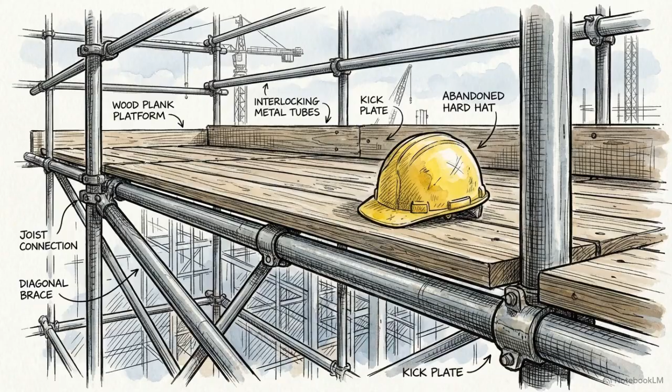For decades, construction workers have been told to keep a straight back and bend their knees. Yet manual handling injuries continue to account for more than a quarter of all reported accidents to the authorities each year. Decades of manual handling training have failed to move the needle on injury rates. Back and upper limb issues remain the leading cause of construction-related absence because building materials are consistently denser and larger than a human can safely manage alone.

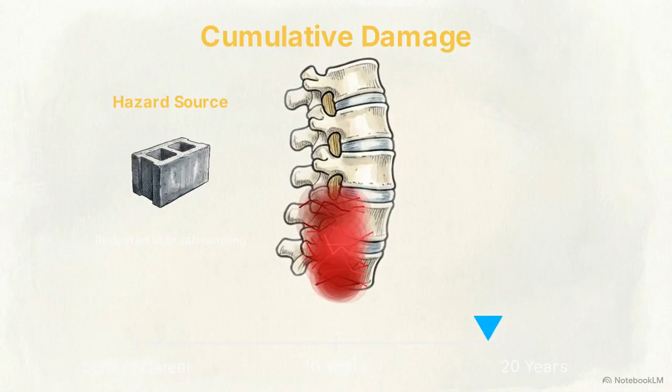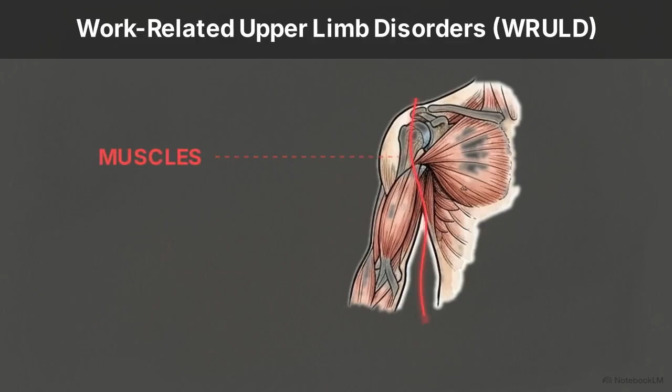Musculoskeletal disorders, or MSDs, are rarely the result of a single dramatic trauma. Instead, they manifest as cumulative damage—the inevitable result of continual bad lifting, twisting, and stretching over months and years of a worker's career. A severe form of this is known as a work-related upper limb disorder, or WRULD: an injury to the muscles, tendons, or nerves of the arms and shoulders, directly caused by carrying out repetitive, strenuous operations over long periods, such as tying reinforcement bars or laying dense blocks.

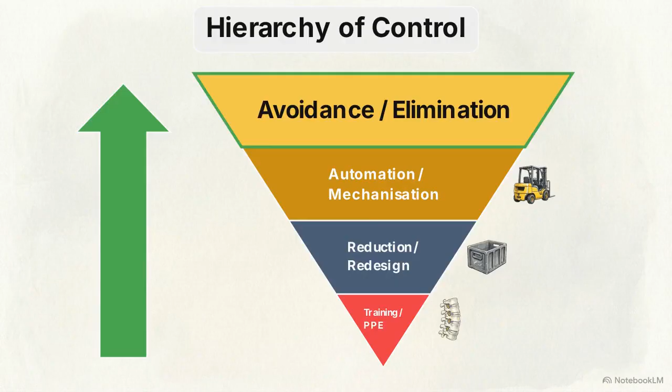In the context of a NEBOSH exam, relying on a worker's lifting technique to prevent these injuries is a failure of risk management. If your proposed solution to a manual handling hazard is simply more training on how to lift, you will not score highly. The required hierarchy of control moves in the opposite direction. It demands engineering out hazards at the design phase, conducting rigorous, multidimensional risk assessments, and introducing strictly regulated mechanization to remove the physical burden entirely.

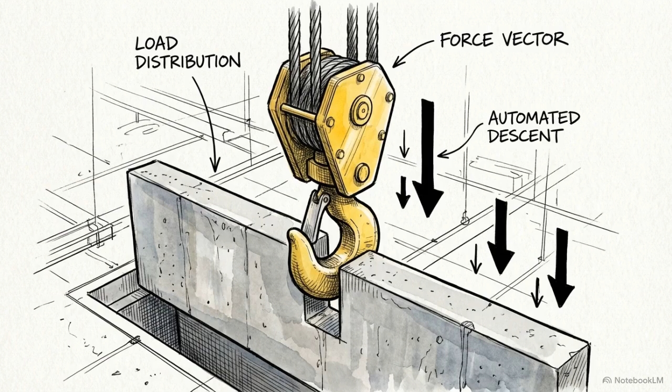Musculoskeletal health on a construction project relies on engineering and logistical decisions made long before a worker ever touches a load. To solve that engineering problem, we must apply ergonomics. Ergonomics is the study of how human beings interact with their working environment, machinery, and processes. It dictates that the task must be designed to fit the worker, rather than forcing the worker to contort to fit the task. The primary duty falls to the designer.

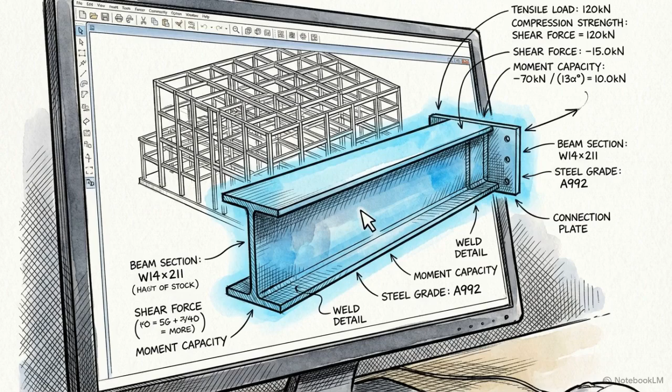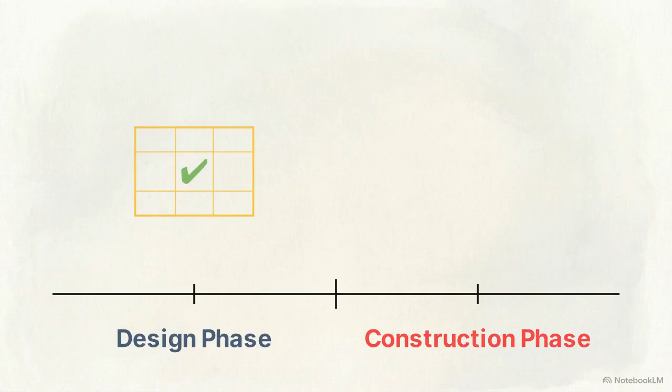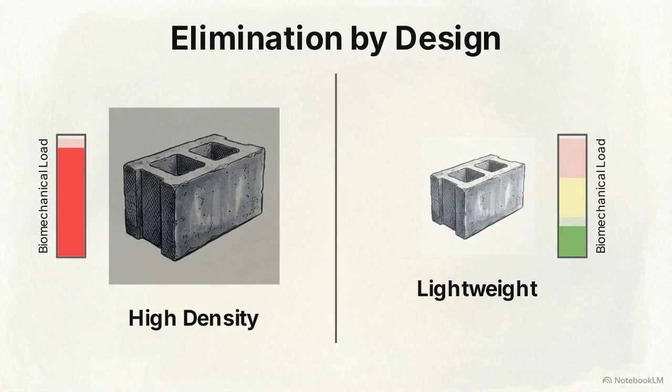Designers are uniquely positioned to assess health risks introduced by their requirements and change the details to reduce the need for long-duration, repetitive, or strenuous activity before the project even breaks ground. This diagram illustrates elimination by design. By simply specifying lighter blocks instead of traditional high-density blocks, the designer removes the need for heavy manhandling entirely, immediately reducing the biomechanical load on the bricklayer.

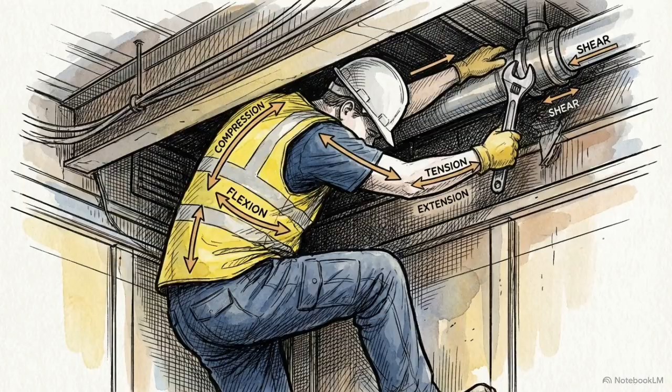Design also dictates mechanization. If an architect dimensions a trench specifically to accommodate the bucket size of an excavator or a remote-controlled compactor, they eliminate the need for a worker to climb down with handheld vibrating tools. Conversely, thoughtless design creates immediate hazards. Specifying service runs in cramped, low-clearance ceiling spaces forces workers into awkward, stretched positions, virtually guaranteeing strain over a long shift.

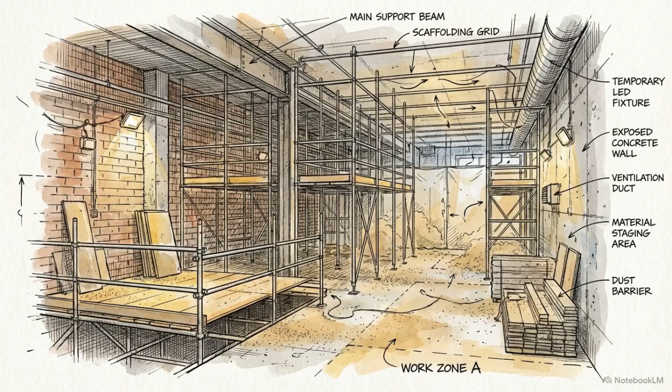The environment specified by the design also heavily influences ergonomics. Low illumination levels lead to accidents because of an inability to see properly, causing visual misperception and awkward posture adjustments during detailed inspection or assembly work.

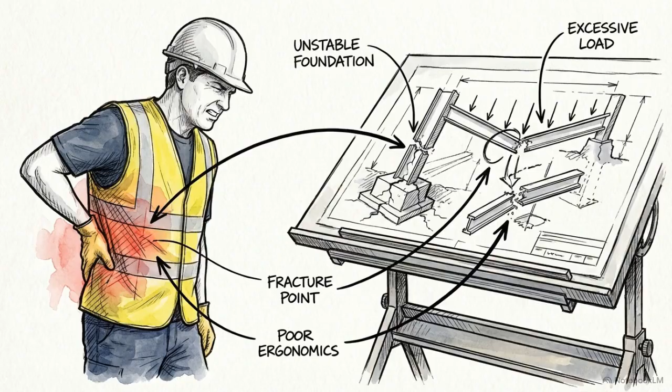When design hazards cannot be completely eliminated, the designer must practice controlling hazards by information. They must communicate these unavoidable risks, like the need to work in a small space, to the principal contractor so it can be managed through the health and safety plan. If the physical demands on the site worker become too high, the risk management failure almost always started on the designer's drawing board.

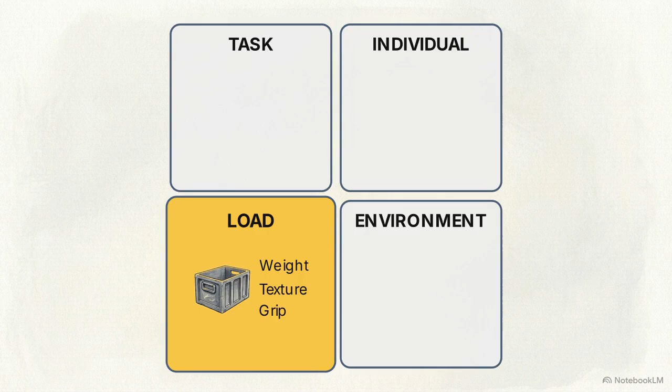When manual handling cannot be avoided by design, the manual handling operations regulations require employers to make a suitable and sufficient assessment of the task. This diagram shows the required framework for that assessment, commonly known by the acronym TILE: Load, Individual, Task, and Environment. The load quadrant evaluates magnitude alongside dimensions, surface texture, and the presence of integral handles, as a slippery surface carries far higher risk than a heavier object with a secure grip.

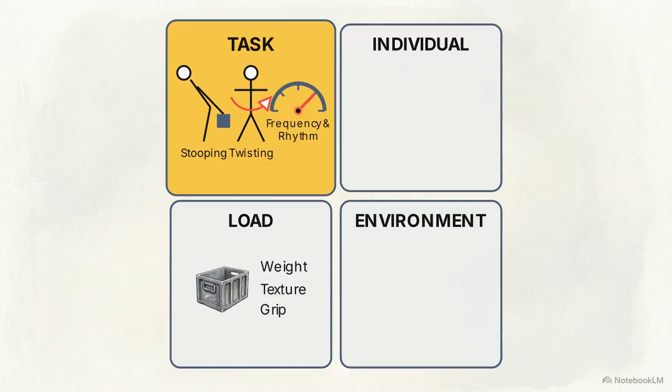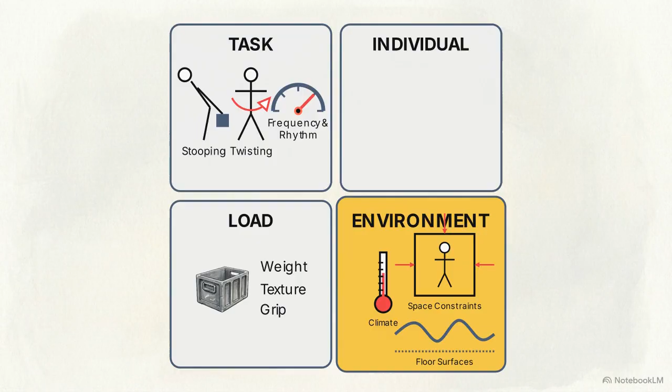The task quadrant scrutinizes the geometry and rhythm of the movement. High frequency, long duration, twisting, stooping, and reaching all escalate the risk profile, even if the load itself is light. The environment quadrant evaluates the space where the lift occurs. Restricted workspaces, uneven ground, and extremes of temperature compromise a worker's posture, forcing them to adopt inefficient stances that increase muscular strain.

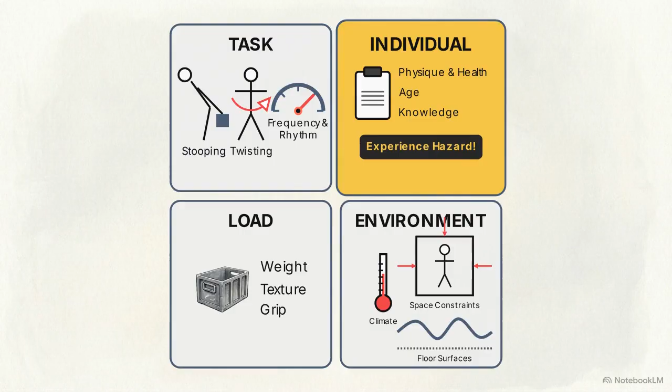Finally, the individual quadrant looks at physical capability, age, and health. It also accounts for experience, which can actually be a hazard, as experienced workers frequently misjudge their own capabilities and overestimate their limits. In an exam setting, a critical mistake is answering a manual handling question by focusing solely on the weight of the load.

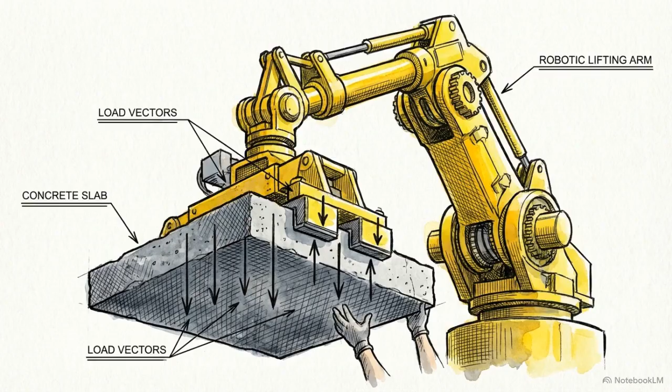Setting safe weight limits is not an effective risk management strategy in isolation. The regulatory mandate is clear: before relying on manual effort, employers must provide equipment to avoid the hazard, automating or mechanizing the process wherever reasonably practicable. A safe lift requires perfectly aligning the worker's physical capability with the load's characteristics, the geometry of the task, and the conditions of the environment.

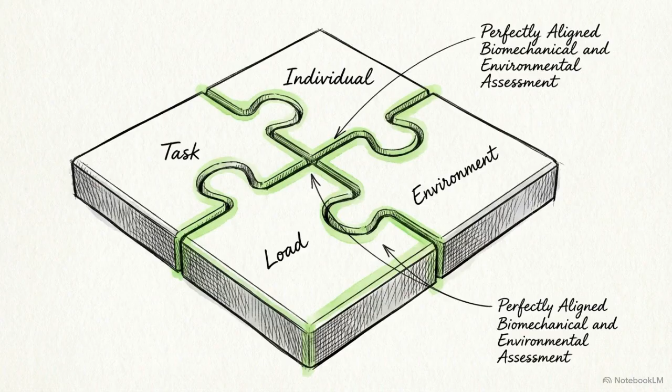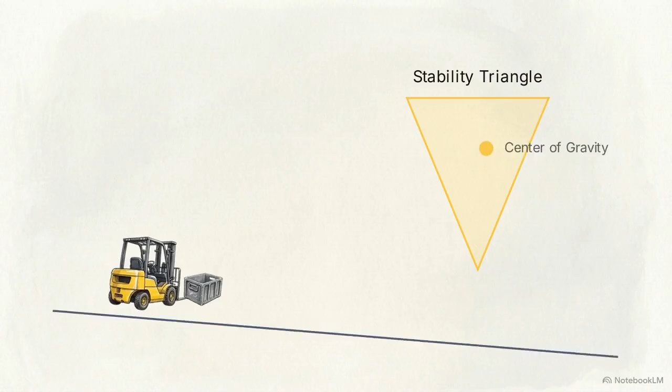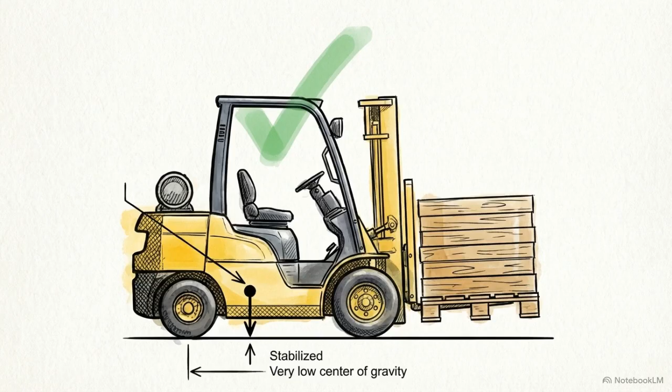However, if the truck travels across an incline with the mast raised, the center of gravity moves outside the vehicle's stability triangle. Overturning is almost guaranteed. Because of these physics, strict operational rules apply.

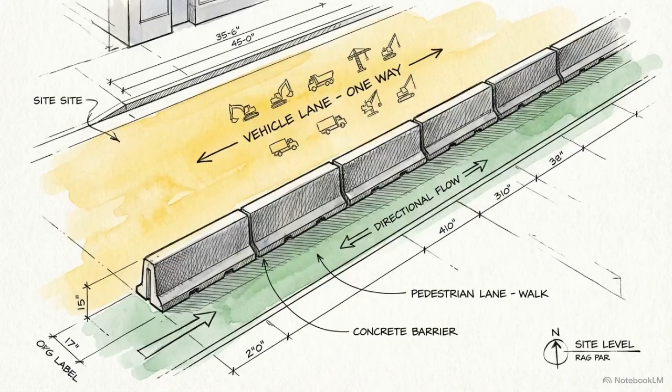Operators must only travel with the load lowered, never turn across slopes, and site management must provide designated crossing points to separate pedestrian routeways from plant.

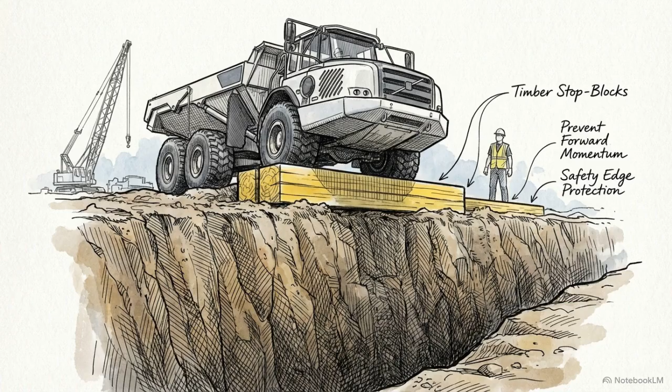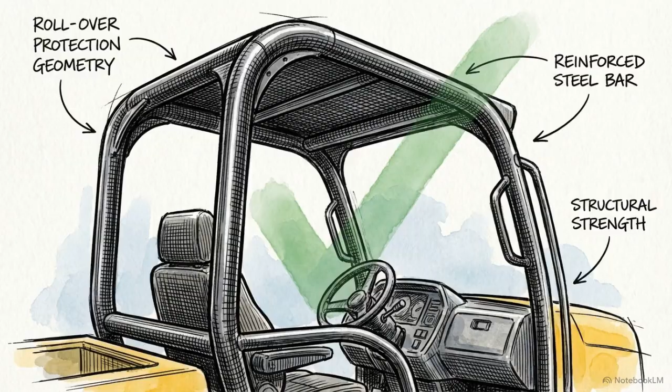Dumper trucks present unique vulnerabilities. Because they use pivot steering by articulating at the middle of the chassis, they are highly susceptible to overturning, especially into excavations if stop blocks are not positioned a safe distance from the edge. To mitigate this, dumpers must be fitted with ROPS, rollover protection structures. A ROPS is an A-frame built over the seat to protect the driver.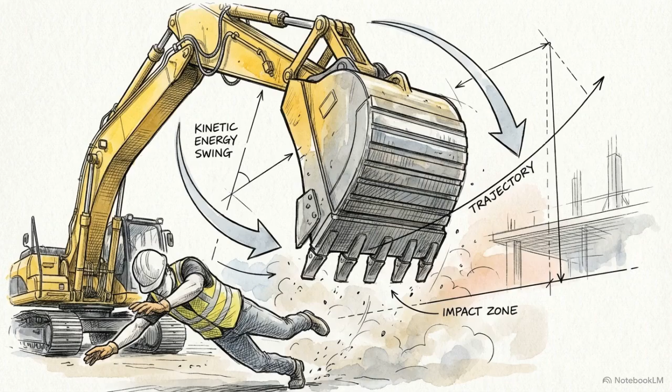Crucially, operators must be instructed to wear seatbelts so they are held safely within the roll cage if the vehicle tips. Excavators require entirely different controls. Beyond the danger of the moving articulated arms striking a worker, operators face the hazard of undercutting. This occurs when the machine digs directly beneath its own tracks, causing the ground to collapse and the machine to fall into its own excavation.

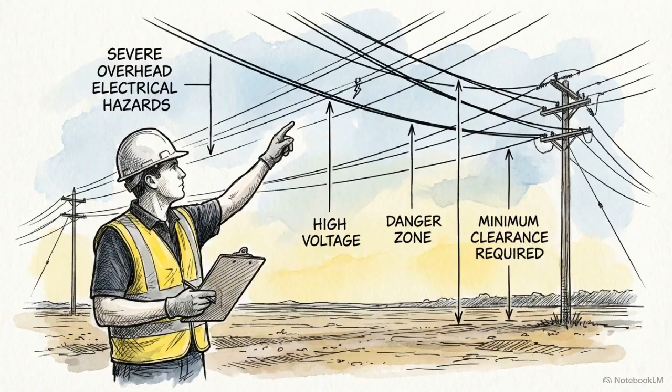Safe operation requires vital pre-start checks. A site survey must be carried out in advance to identify overhead power lines, height limitations, and underground services like gas and water pipes. The fuel powering these machines introduces secondary risks.

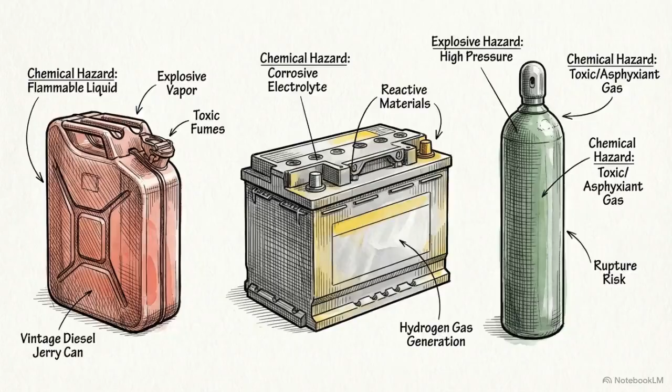Diesel engines expose workers to carbon monoxide fumes and fire risks, while charging battery-powered plant creates hazards from caustic acid, electrical arcing, and the buildup of highly explosive hydrogen gas.

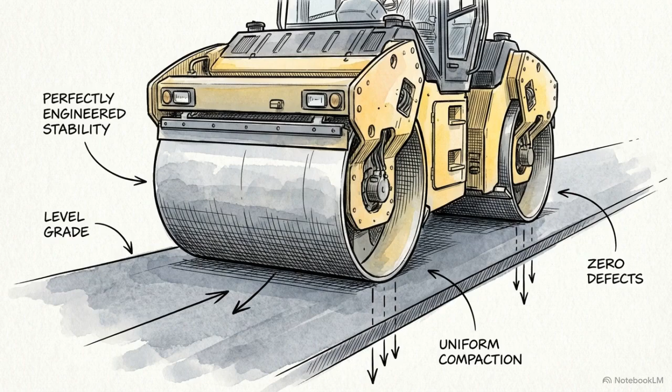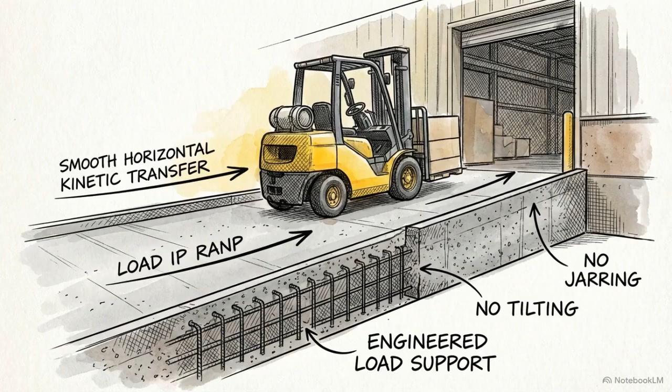Direct supervision of every site vehicle is impossible. Therefore, the examiner expects you to prioritize controls like site layout, flat driving surfaces free of potholes, and ensuring only competent certificated operators hold the keys. Mechanization is only a valid risk control if the site environment is engineered to support the physical limits of the machinery.

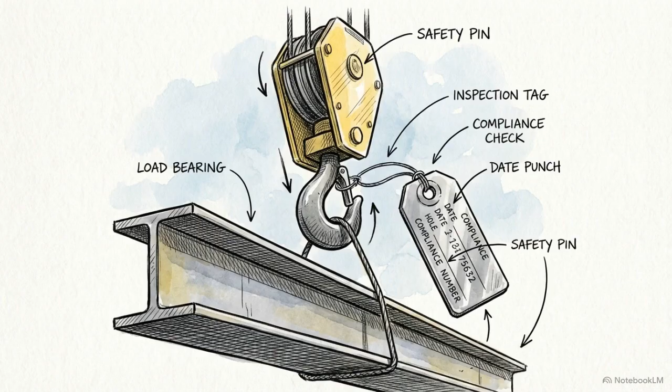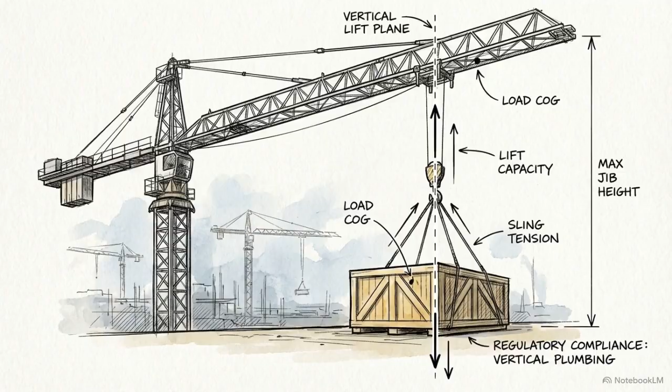When plant is used to suspend a load, it falls under LOLER, the Lifting Operations and Lifting Equipment Regulations 1998. LOLER is the strict regulatory framework governing any mechanical lifting of a load in a vertical plane. The baseline requirement of LOLER is that all lifting equipment must have adequate strength and stability for the proposed use.

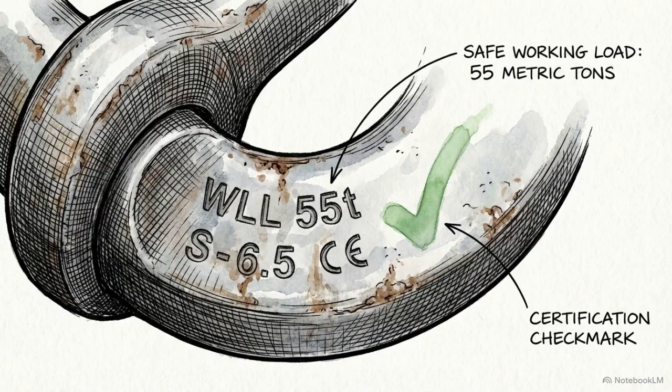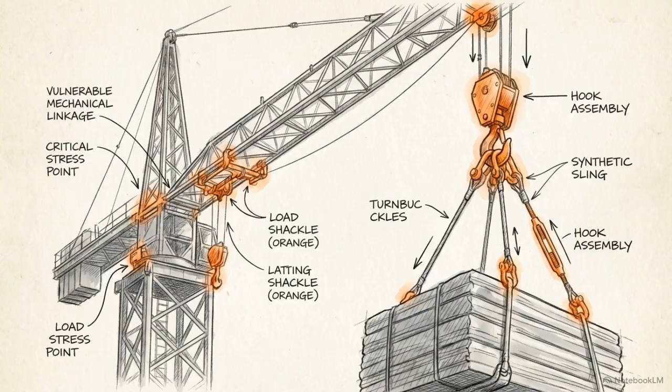Furthermore, every item must be clearly marked with its safe working load, or SWL, which dictates the absolute maximum mass it is legally permitted to lift. The integrity of the lift often relies entirely on the lifting accessories, the slings, shackles, and eye bolts used to connect the equipment to the load. These accessories are the most vulnerable components in the lifting operation.

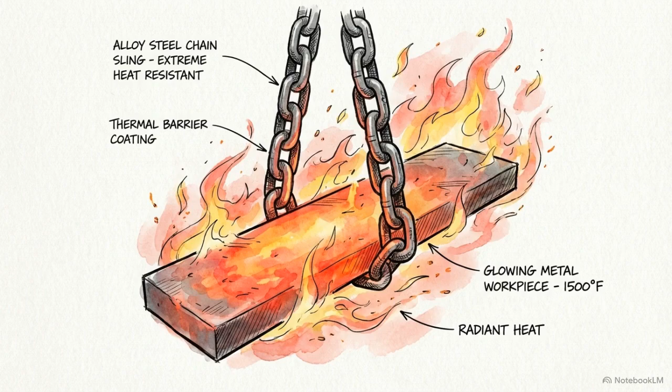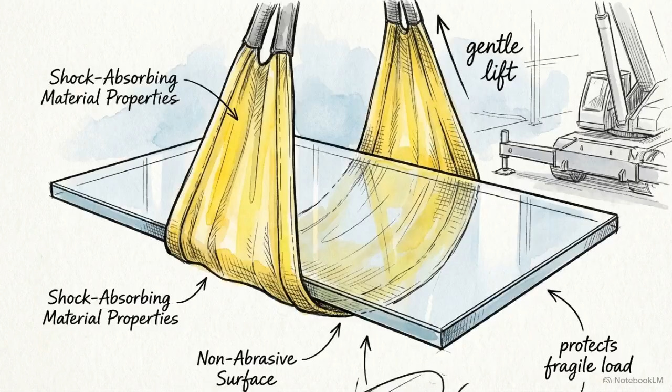Material selection is critical. Chain slings are excellent for handling loads up to extremely high heat, but they are vulnerable to catastrophic failure from sudden shock loading. Synthetic web slings will not scratch delicate surfaces and absorb shock well, but they will melt and fail if exposed to high concentrations of acid.

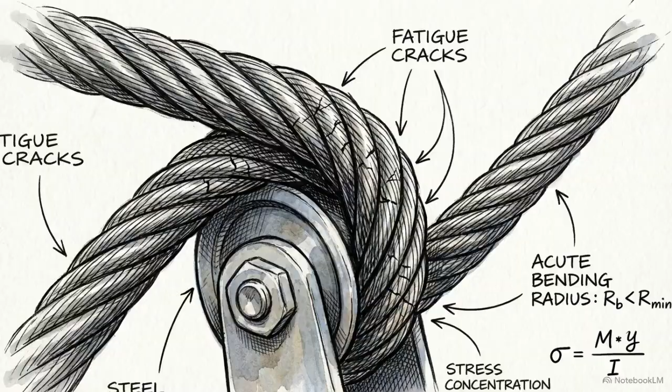Wire rope slings fail from fatigue. Repeatedly making small radius bends causes tiny cracks in the wire strands. Over time, this structural abuse leads to bird caging, a critical defect where the wire rope strands are forcibly untwisted and spread outward, permanently destroying the sling's strength.

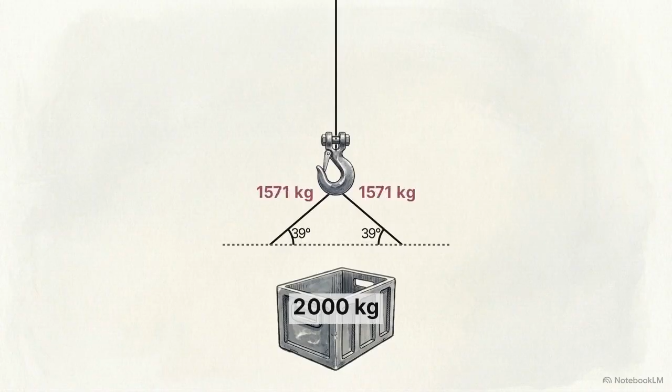This diagram shows a crane hook lifting a load with a two-leg sling. As the angle between the sling legs widens or flattens out from 60 degrees down to 30 degrees, the physics of rigging dictate that the tension and stress exerted on each leg increases exponentially, even though the weight of the load hasn't changed. The hardware connecting those slings must match the geometry.

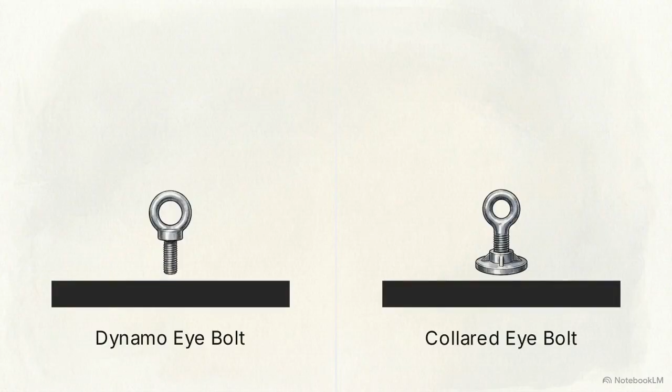Dynamo eye bolts have a weak neck and must only be used for direct vertical lifts. If a sling is pulling at an angle, the collared eye bolt must be used, as the substantial neck provides the necessary strength to support the offset component.

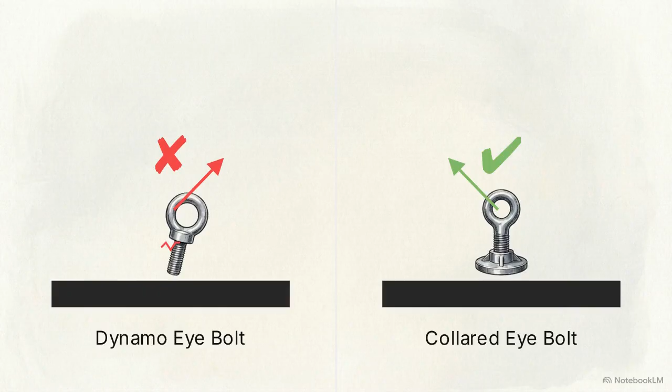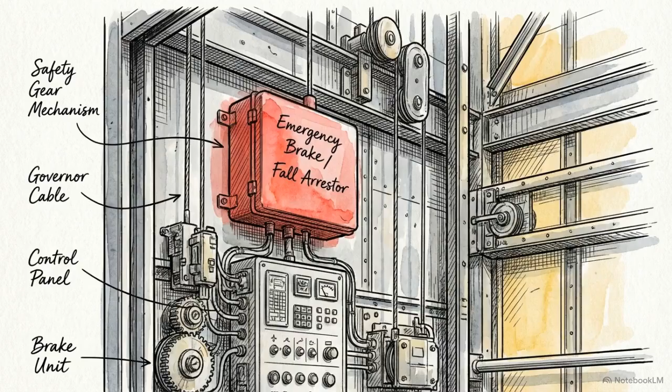The regulations distinguish strictly between lifting materials and lifting persons. Equipment used for raising or lowering people must be specifically designed for that exact purpose. Hoists and lift cars carrying personnel require mandatory safety devices. They must have independent free fall arresters, solid interlocking doors that prevent the lift from moving if open, and edge protection to prevent crushing against the lift shaft.

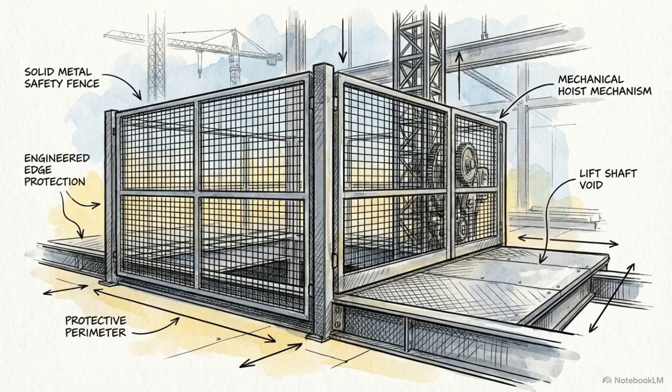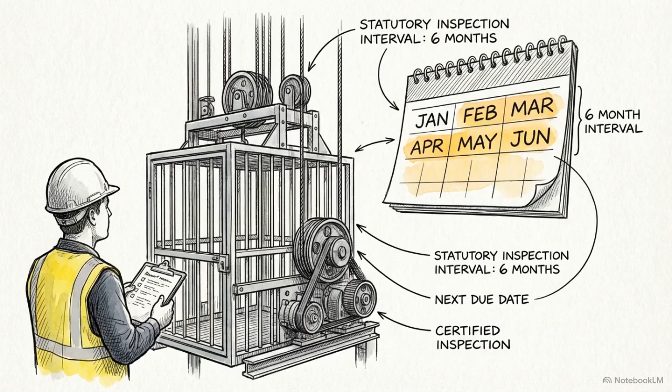To verify these systems, LOLER mandates strict inspection intervals. A thorough examination by an independent, competent person must occur at least every 6 months for any equipment lifting persons, and for all lifting accessories. By contrast, equipment used solely for lifting materials, such as standard excavators or dumpers, must undergo a thorough examination at least every 12 months.

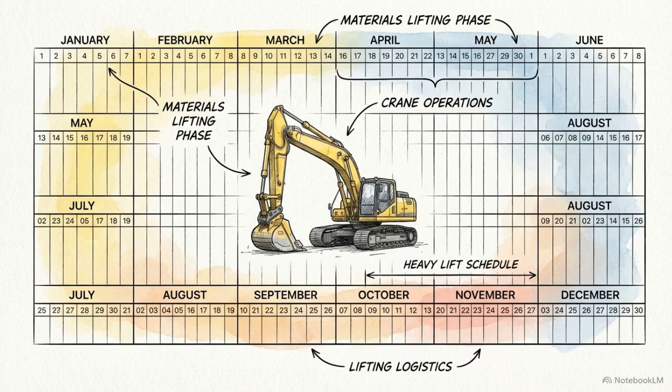A heavy lift only looks effortless on site because it is underpinned by rigorous mathematical planning, strict adherence to safe working loads, and a relentless statutory inspection regime.

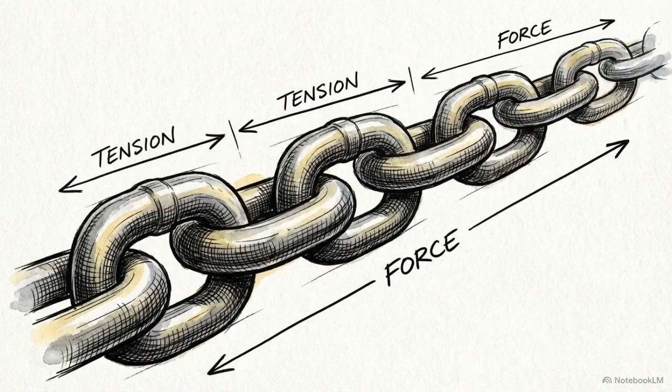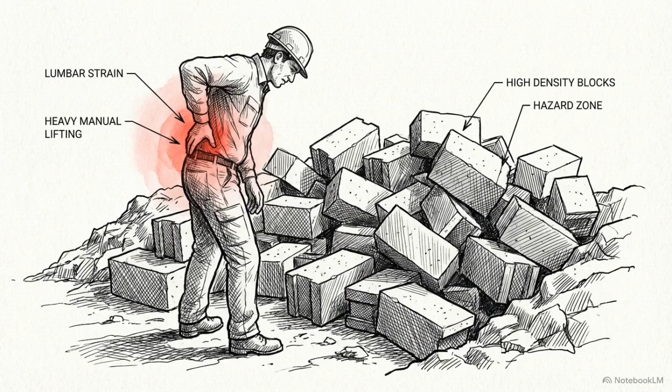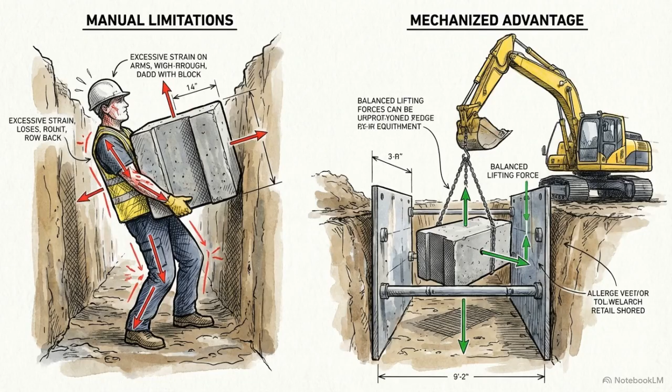Deploying mechanization without strict LOLER compliance and thorough examinations results in catastrophic failure. In exams, follow this path. Prove you understand elimination by design and mechanization before mentioning worker training or personal protective equipment.

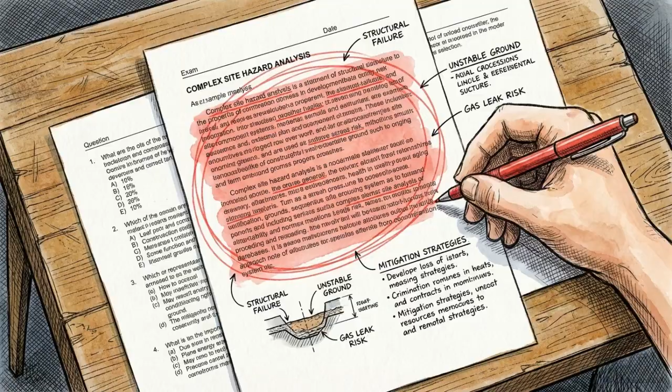When presented with a load handling scenario, you must evaluate the geometry of the task, the constraints of the environment, and the physical limitations of the equipment simultaneously.

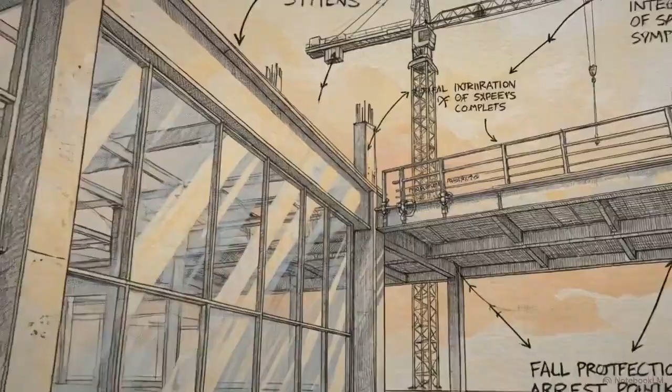Mastering Element 8 means seeing beyond human muscle. It means understanding the complex engineering, physics, and regulatory systems that keep construction workers safe.